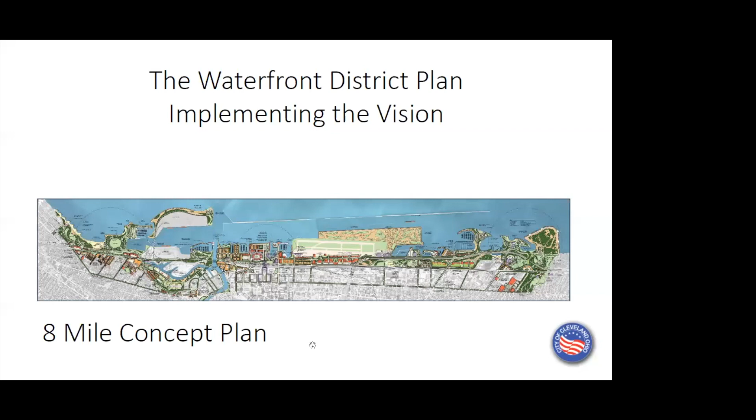Thank you, Kelly, and thank you all people out there who are listening to this presentation. I want to talk a little bit about the journey, and I use that term because when we think about our waterfront, that 8-mile stretch, it is a journey from west to east. As we look back and established the vision for the waterfront, this is the implementation of that vision. This CHEERS process is very important to creating access and opportunities for people in our communities. Next slide, please.

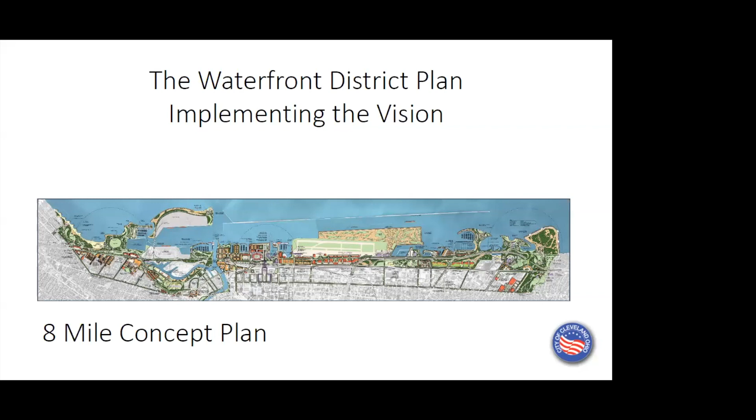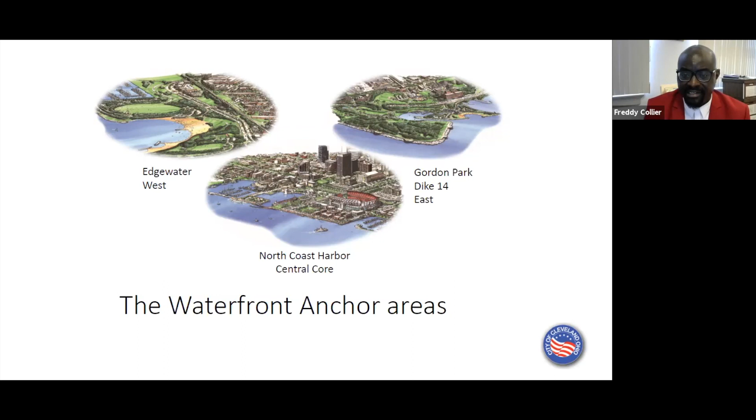When you think about the 8-mile stretch of waterfront, we looked at 3 separate areas: the eastern waterfront, which consists of assets like Gordon Park, Dike 14; the western waterfront, which embraces Edgewater Park, and our North Coast Harbor, our central core waterfront. These geographies really define where the true opportunities exist to capitalize on this God-given asset for our community. Next slide, please.

One of the things you'll notice about the waterfront district plan with respect to its priorities: one was linking neighborhoods — how do we get neighborhoods connecting to the water? You'll hear a lot about that from Mary and the panelists today. Next slide.

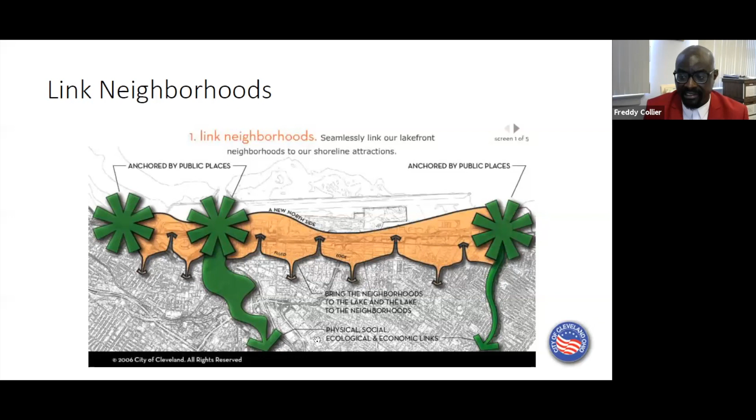Another key piece is how do we master geography and leverage the geographic context that Cleveland sits in? Most of our shoreline sits beneath our mainland and creates great opportunities for great view sheds. Next slide.

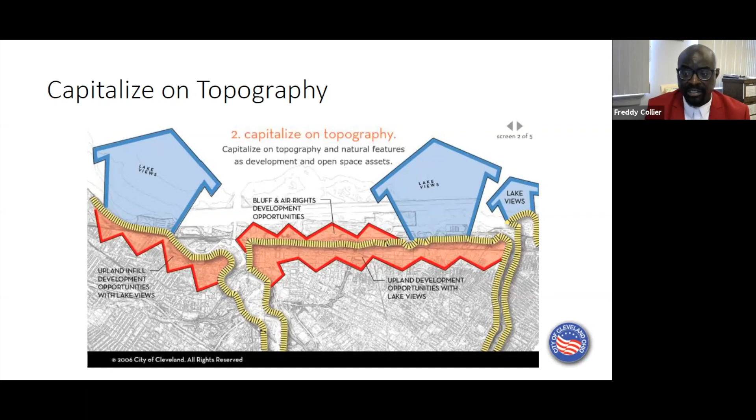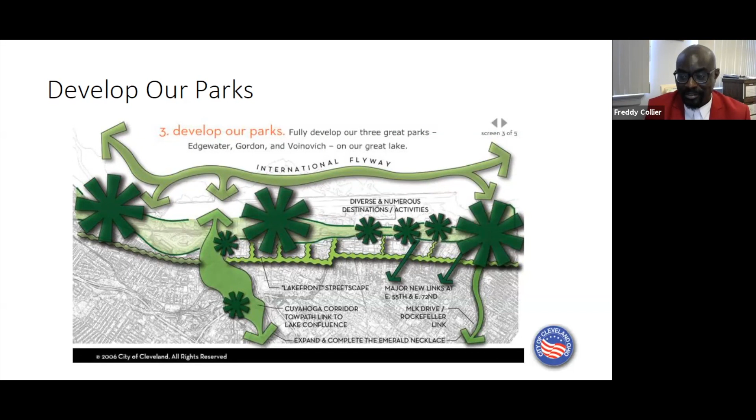Another key principle is how do we leverage and develop our parks, and also extend our parks out into the water, which you'll see a little bit of in the presentation. Next slide, please.

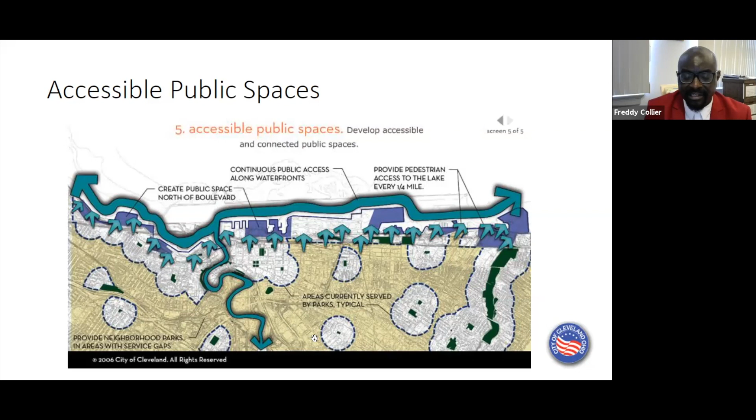One of the most important aspects of the waterfront district plan was the principle around accessible public spaces, and the key word there is accessible. We have to overcome many barriers that were man-made, and in part, what CHEERS in this effort is doing is helping us course correct from some of the historic errors made with respect to the interface between land and water. How do we reclaim that?

Next slide, please. So let's talk a little bit about what we did in the West. Next slide.

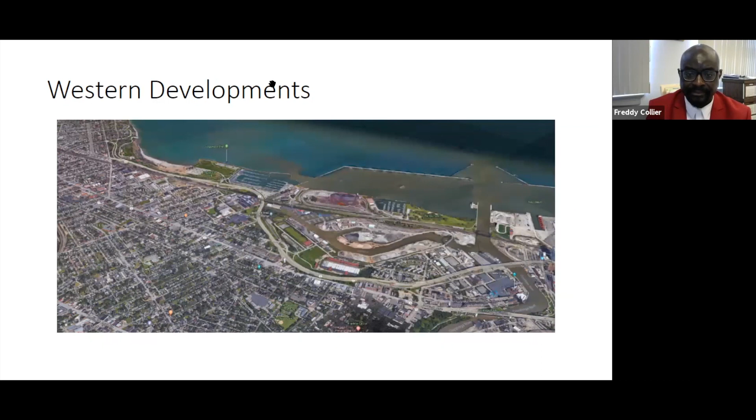To overcome some of those barriers and create those connections, we had to really rethink how we started to punch through man-made barriers, such as railroad tracks, et cetera.

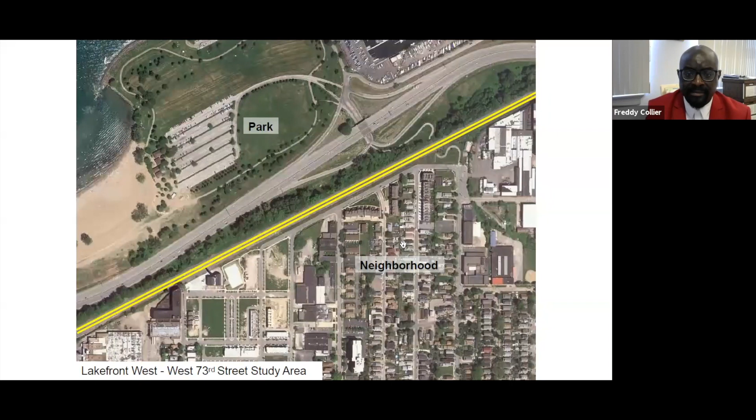So, beginning to take advantage of linkages, we can create opportunities to access things like Edgewater Park and really make it a pedestrian connection, looking at things like West 73rd Street.

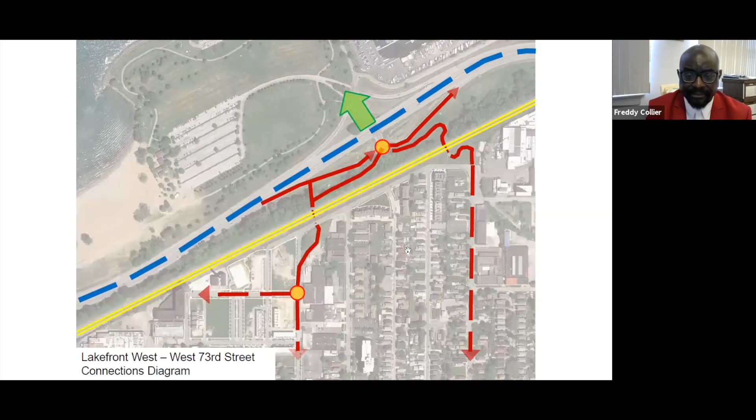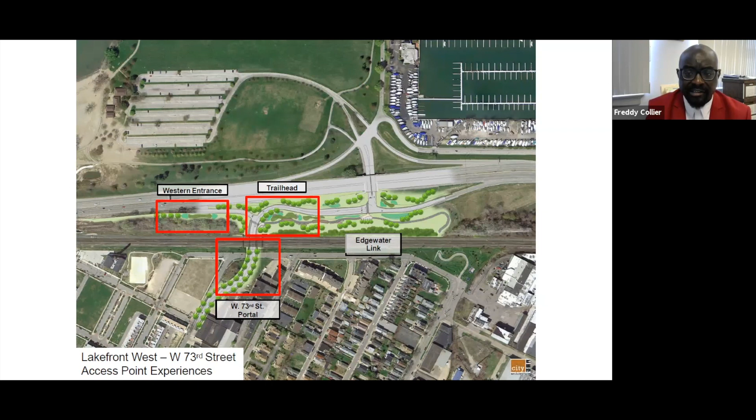These are some examples of earlier renditions of what that connection would look like if you were to punch through underneath the tracks, and you will also create opportunities to overcome the West Shoreway.

The result of creating those infrastructure improvements—one key example is Edgewater Park. Many of you have witnessed the amazing beach house that the Metro Parks implemented, and it now is an asset that actually really draws the neighborhood to the water.

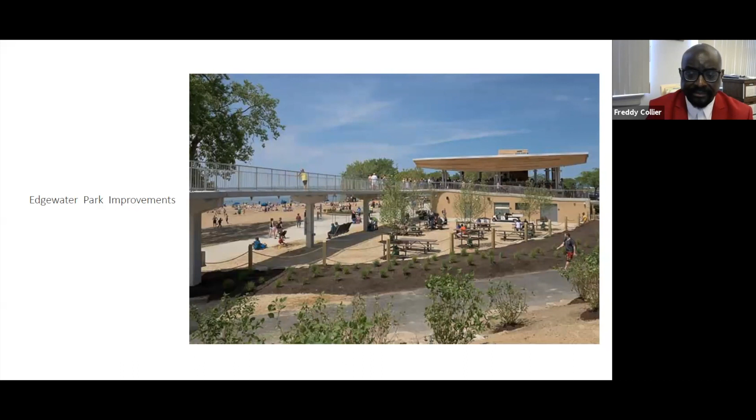Also, neighborhood improvements have resulted. When you start to make land opportunities available and create connections to natural assets, these are the results.

Let's take a look at our harbor front or downtown development. When we look at our core waterfront, how do you begin to connect the downtown grid to our water and make that seamless?

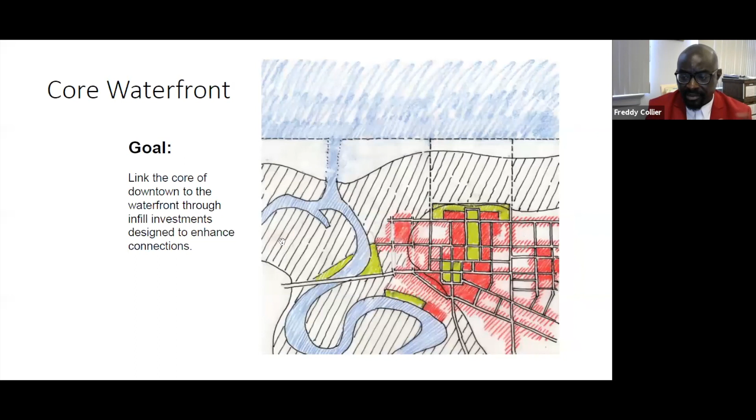So in each one of these sections, we're overcoming hurdles. The first step in that process was improving the malls.

You all know that we've made significant investments in Public Square. We also made significant investments in the malls, and we seek to further connect those.

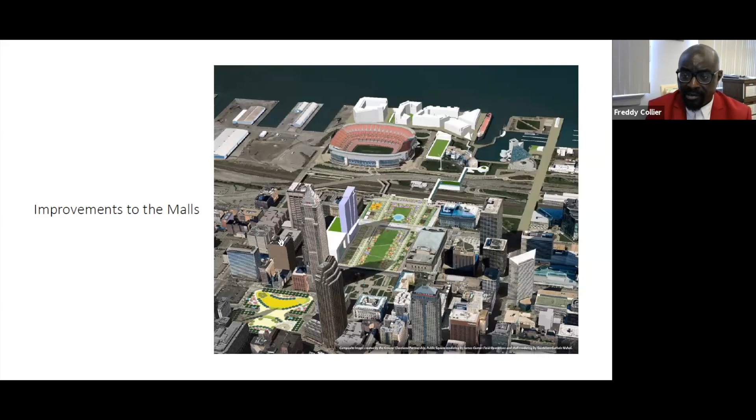As you have recently witnessed with the lakefront connector, this is an example of how we are achieving the goal and envisioning an opportunity to create a seamless interface between our inland neighborhoods and our downtown neighborhoods, so that people can connect and reclaim their relationship with the water.

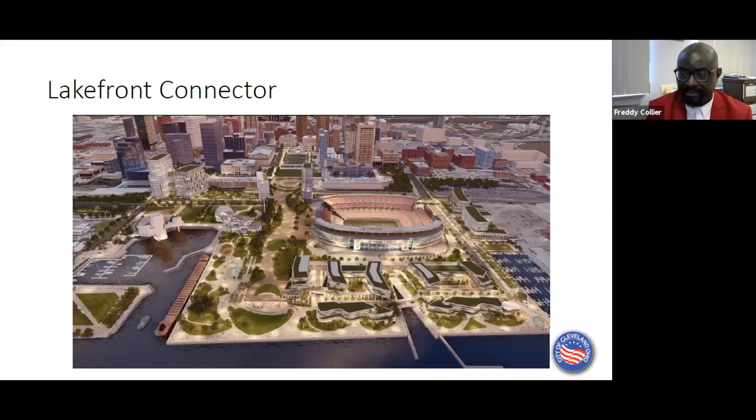These are some other examples of investments that have happened along the waterfront—again, not just creating public space, but also activating our waterfront.

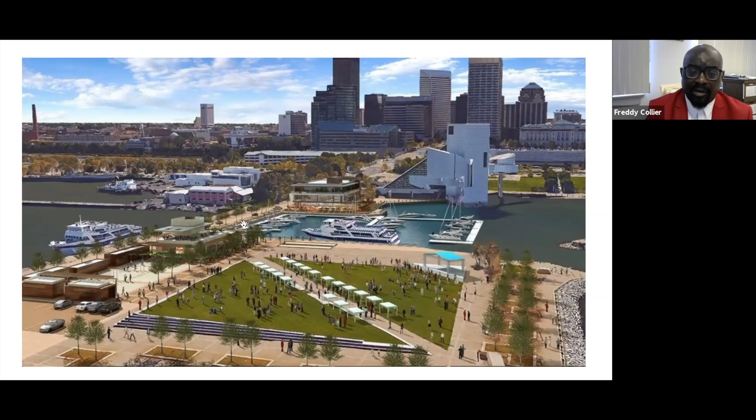Now, as we move east, we start to really look at the true neighborhood opportunities. The eastern development opportunities create a tremendous opportunity to connect the unconnected.

Many of the neighborhoods south of here—if you were not from Cleveland and you were riding down the street just parallel, you would not know you were in a lakefront community. So how do we begin to reestablish that connection?

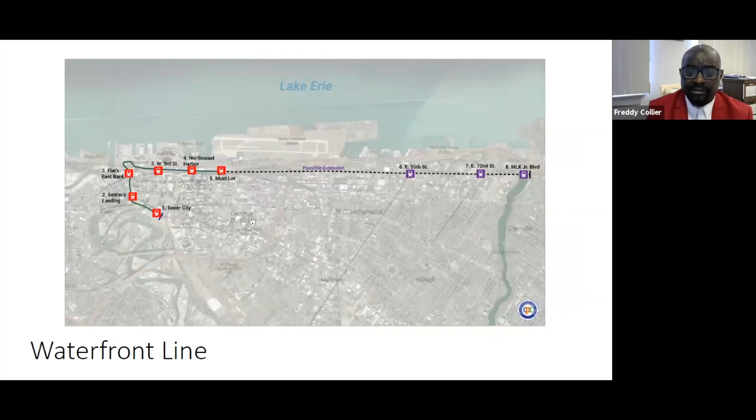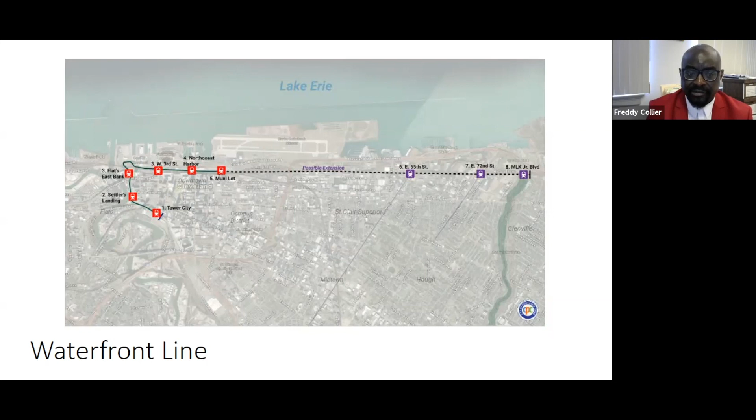One of those connections exists via rail lines. How do we use these north-south streets to create investment opportunities, taking advantage of the connection that exists from our downtown, our river valley—which is our other waterfront—out to these areas that will create access for people, not just through the neighborhood, but by utilizing public transportation.

And also, how can bicyclists and pedestrians connect to this area? We see tremendous opportunities to implement this East Side connector that would connect residents from our core city out east to some of the assets that you're going to be introduced to today.

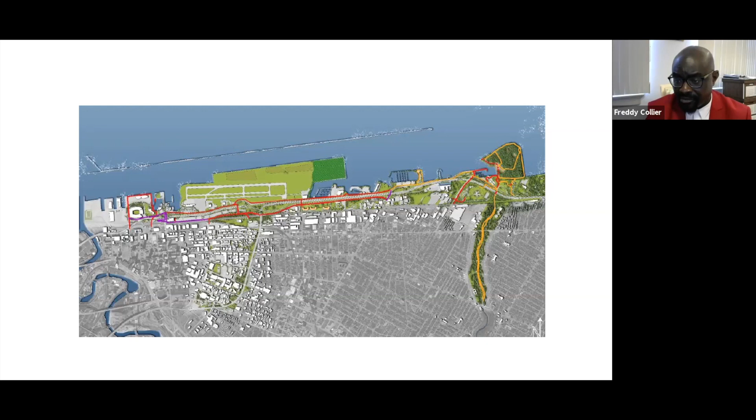I'd be remiss if I didn't talk about the key developments that are happening. The more investments we make, the more human capital we have on our waterfronts—people living, working, biking, experiencing our water on a day-to-day basis. This is key with respect to what you're going to see today.

And the amenity that is created as a result of the CHEERS effort, we believe, will help draw potential residents and visitors to not only come and experience our city, but actually live in our city. The shoreline development is one example of that.

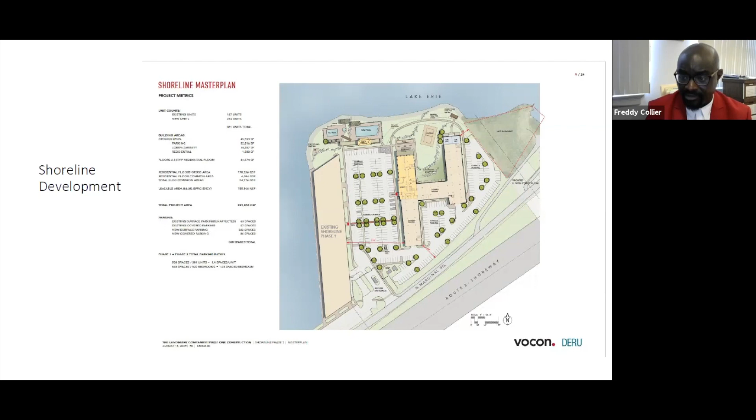And other developments along East 55th Street—that's really going to create an opportunity for people, not just in the city but in the entire region, to experience what you're going to see today.

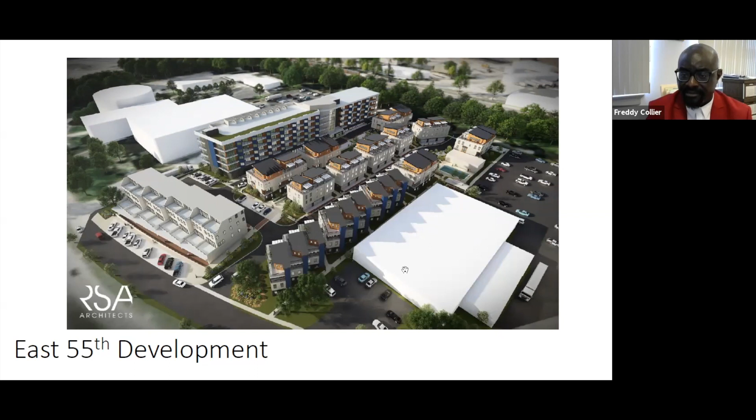So this area that we're talking about is one that was envisioned to be one where connections are made, amenities are created from literally nothing, which is something you're going to see today in this presentation. We seek to create opportunities in neighborhoods to connect our residents back to the water, to protect habitat, and to create true opportunities so that residents can really touch and experience God's asset that he's given to this community.

So I'm going to turn it over to Kelly. She's going to talk to you about this specific opportunity at this specific time that we see us taking advantage of, and creating what the Waterfront District Plan envisioned.

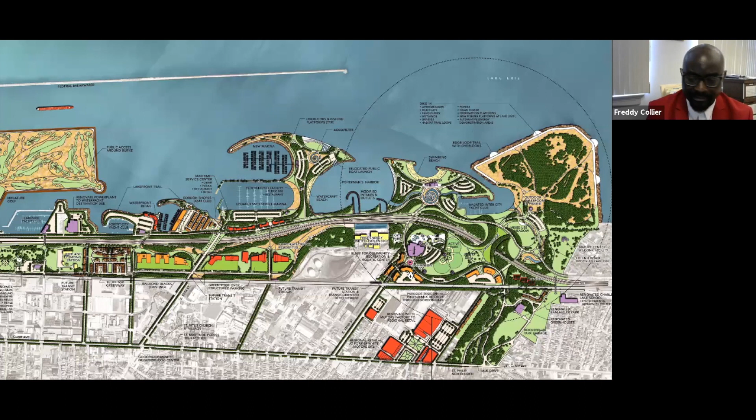Thank you. Kelly? Thanks, Freddy. That was a great introduction and really shows a lot of the potential along the lakefront. So this is an image from the east side lakefront today.

Maybe not the most welcoming weather, but we're really working hard to make Cleveland a four-season city.

A little bit about the conditions in the existing project area. There are some challenges. A lot of this area has heavy duty rock shore protection, steel break walls, just a lot of water, lawn, parking lots, not a lot of in between. We see tremendous impact from the lake.

This project site is east of the terminus of the federal break wall. The image you see here is not an uncommon occurrence, with waves crashing onto the land and along the adjacent I-90 interstate. There's a lack of community access. As Freddy pointed out, we have a lot of neighborhoods adjacent that we really want to feel they are truly lakefront neighborhoods. And then again, just that wave action, storms and ice.

So what's driving this work? We really have a vision that we can create a lot of space for additional habitat. It's also important that we locate places for the beneficial reuse of dredge material. As most Clevelanders know, dredging the federal shipping channel is an important economic driver for us locally. And then making sure we're improving access and lakefront conditions, and as Freddy touched on so well, spurring new and equitable development.

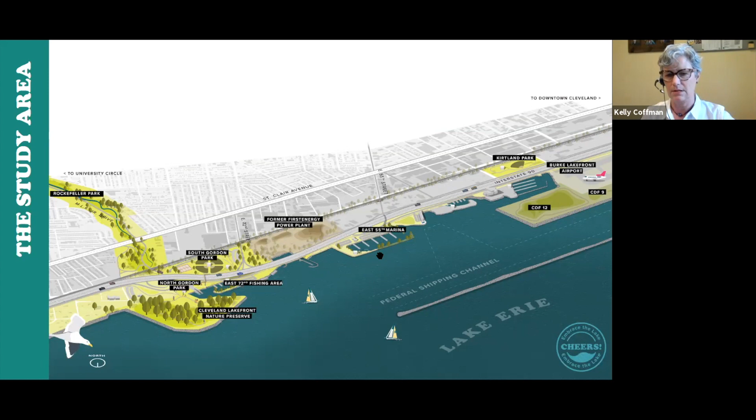So the study area - this is an aerial view to orient folks. Downtown is to the right side of your screen. There's Burke Lakefront Airport, Interstate 90 along that northern edge. And then you see the pockets of park space with East 55th Marina, East 72nd, and the Cleveland Lakefront Nature Preserve.

So with those potential opportunities along this stretch of the lakefront, we were able to form a partnership. It's a partnership right now of 5 entities who are participating equally: the City of Cleveland, Cleveland Metroparks, along with the Ohio Department of Natural Resources, the Ohio Department of Transportation, and the Port of Cleveland.

So the vision for Cheers is really, let's look at this stretch of the lakefront. By the way, Cheers is just an acronym to shorten the Cleveland Harbor Eastern Embayment Resilience Study, because that's definitely a mouthful. But looking at how we can take this resource and build upon it to make it the foundation of a resilient neighborhood.

A crucial part of this project is not only the 5 partners, but engaging with multiple stakeholders, working with agencies also conducting work in the area. There's a lot of important community improvement work going on, and also stakeholders who are maybe more grassroots or smaller organizations that also share in this part of the vision for the lakefront.

So what our work has really been able to do is generate these more specific goals of the 5 partners, with a lot of overlap, a lot of shared goals, but listening to the community and making sure the project is really driven by the input we're receiving from residents. We're working as hard as we can to really hear from those local residents.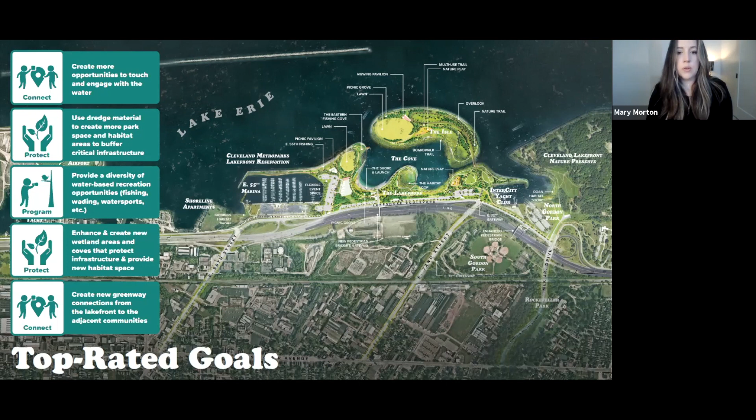We also made sure that we were incorporating those top projects from the engagement session. These were really shaped by that community feedback of what people wanted to see along the lakefront. This includes the protected cove where people can walk down into the water and have more of an actual connection with the water, whereas now they just kind of can stand along the edge and look at it.

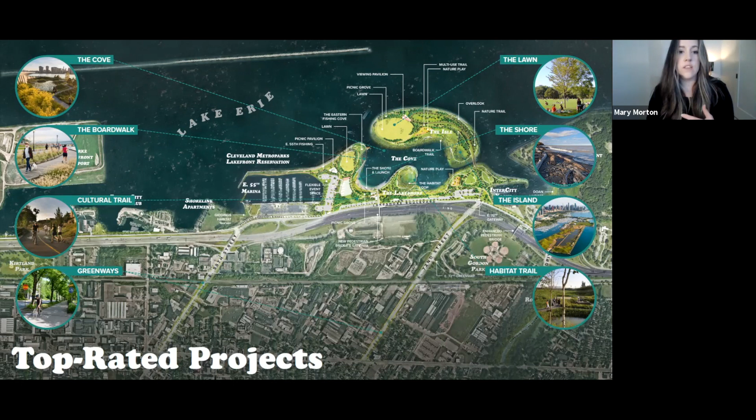As well as multiple trail experiences, including multi-use trails, nature trails, and boardwalk trails, as well as greenways that extend open space back into the community, lawn spaces for picnicking, a shore for wading, and an offshore island that allows for the creation of this really protected cove.

Kelly touched on this a bit, but I'm going to talk about how the plan meets some of these larger goals from a citywide perspective: nature, access, and community.

From the city's perspective, it helps store up to 1.7 million cubic yards of dredge material. This is material that needs to go somewhere, right? It's dredged every year, and this provides a great opportunity to use that material in a way that really connects residents to the lakefront.

It also protects I-90 and improves safety for ODOT. The waves lapping over the highway have been a safety issue for a very long time.

So this provides a clear buffer that really helps remove that issue. And it provides equity and recreation amenities and really supports tourism and economic development for the community.

It also enhances nature with new natural areas, aquatic restoration and improved water quality, and over 6,000 linear feet of softened shoreline. And from an access perspective, it provides not only a diversity of trail experience, but also strengthens those existing neighborhood connections to allow for greater access to the communities.

From the community's perspective, it allows those places for folks to really engage holistically with the water and provides a number of passive and flexible recreation spaces that really build upon what people already love about the lakefront.

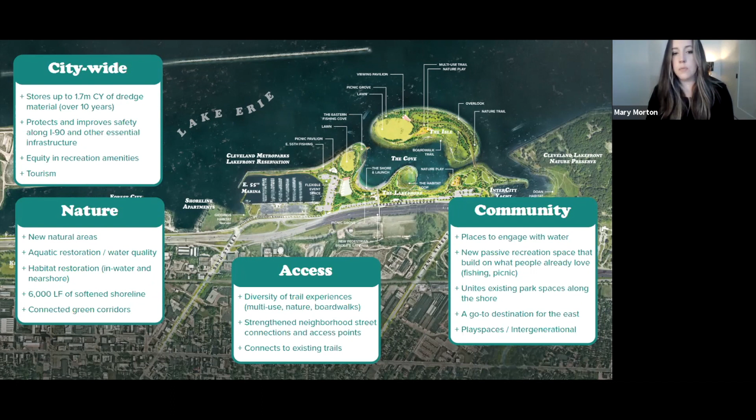So the plan itself is organized in 3 main components. The isle is the offshore island that you see in this image that's really situated offshore to provide protection, but also a whole new way to experience the lakefront, being further out in the water.

The lakeshore extends the existing shoreline, creating a welcoming connected park space that interfaces with adjacent communities. Major gateways at 72nd Street, East 55th Marina, MLK Drive, and a new pedestrian bridge adjacent to the former First Energy plant provide connections to the lakefront with existing neighborhoods like St. Clair Superior and Glenville, as well as Hough.

These gateways not only provide a safe and accessible connection for pedestrians and bicyclists, but they also serve as trailheads, strengthening the existing local and regional trail system.

The lakeshore also leverages existing activity nodes at 55th Street Marina and North Gordon Park, where folks already enjoy to fish, creating a new gathering recreation space to serve the community. The Cove is then nestled between the two, providing those spaces for habitat restoration and water-based recreation in a protected area.

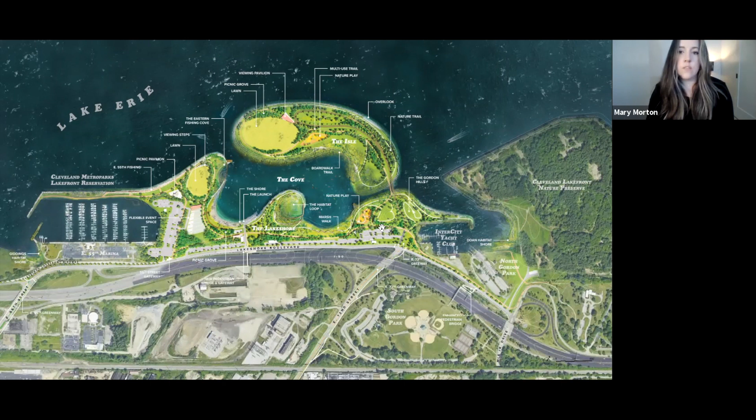So the planned systems of community, nature, water, and circulation really help adapt to the changing needs of the surrounding communities and the environment. Together, these systems work to bolster the quality of the natural environment, physical and mental well-being, safety, and Cleveland's economic development and tourism.

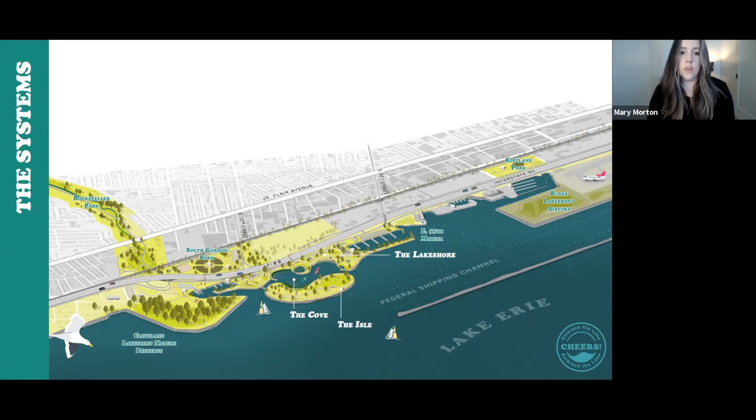A variety of community serving spaces line the lakefront and the Isle. This includes visitor amenities like concessions and restrooms, play spaces, and water recreation, including kayaking and fishing, as well as viewing and scenic areas where community members can take in expansive views of the city.

And then those flexible lawn and picnic areas for passive and active recreation that also allow for immersive natural experiences.

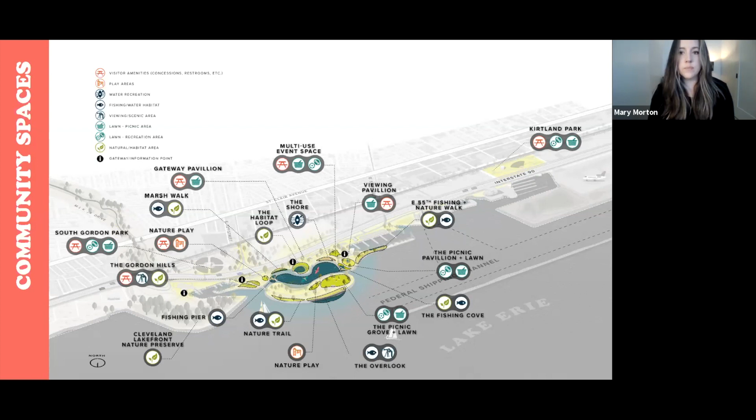The plan includes a variety of trail types to serve multiple user groups, from multi-use paved trails for biking, walking, and running, nature trails that meander through new wetlands, marshes, and habitat spaces, and boardwalk trails that extend over the water of the Cove.

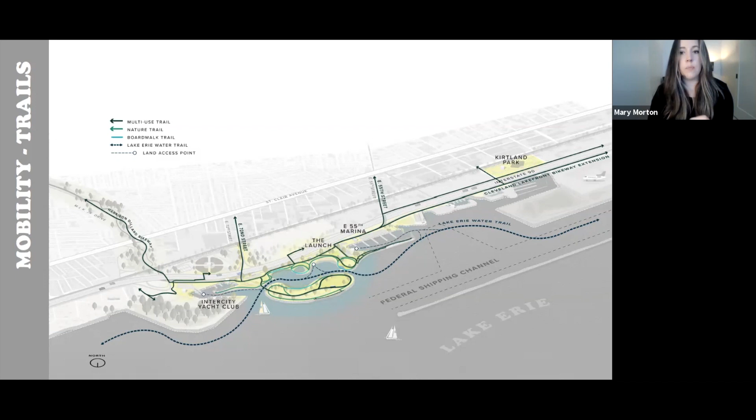All of these trails connect back to those existing regional and local trails like the Lake Erie Water Trail and the Cleveland Lakefront Bikeway that Director Collier talked about earlier.

From the vehicle perspective, with the expansion of the parkland adjacent to I-90, it allows for the extension of Marginal Drive, which is now called Lakeshore Drive. Right now you have to actually hop on the highway to get from one side of the lakefront to the other, so this allows a more seamless connection and a parkway that really connects those parks.

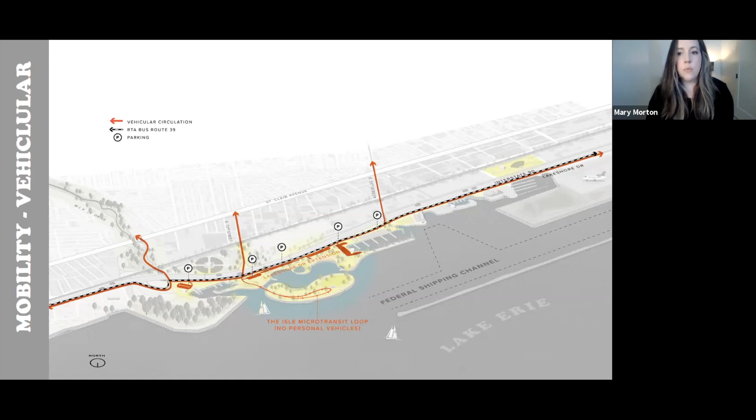Parking lots and vehicular circulation are also hung off of that main drive, which improves the whole experience of someone enjoying the lakefront. Also, by improving the frequency of the existing RTA route and providing a shuttle or microtransit loop that brings folks out onto the Isle, this will help reduce dependence on cars for the long term.

The creation of an offshore isle, as I mentioned before, allows for the softening or semi-softening of the interior of the Cove. So you can see in this diagram the direction of wave forces that are quite intense.

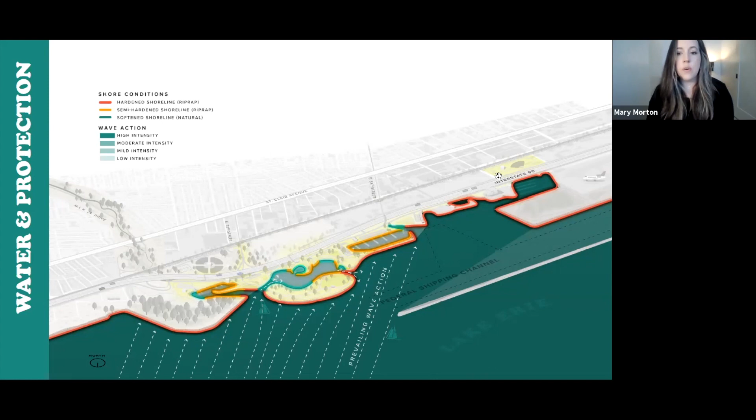The areas in red and orange represent an intensity of wave action, which necessitates larger stone and protection structures, while areas in green and yellow represent areas where the shoreline can be softened.

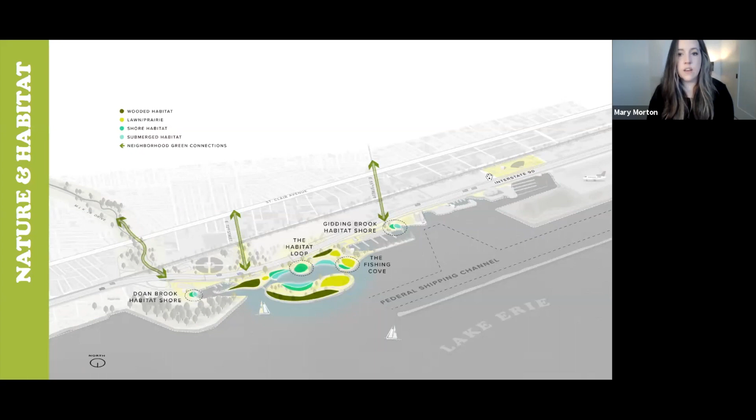The protection provided by the Isle also allows for expansive new habitat areas and natural areas, both in water and on the shore.

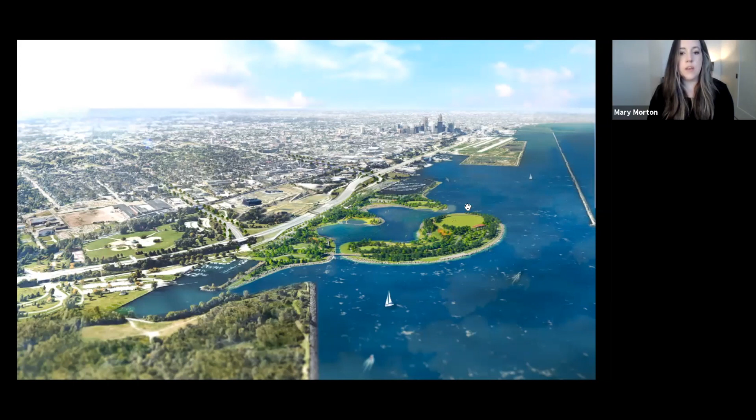I'm going to quickly walk through some of the experiences or rooms of the plan that were really animated by this community input.

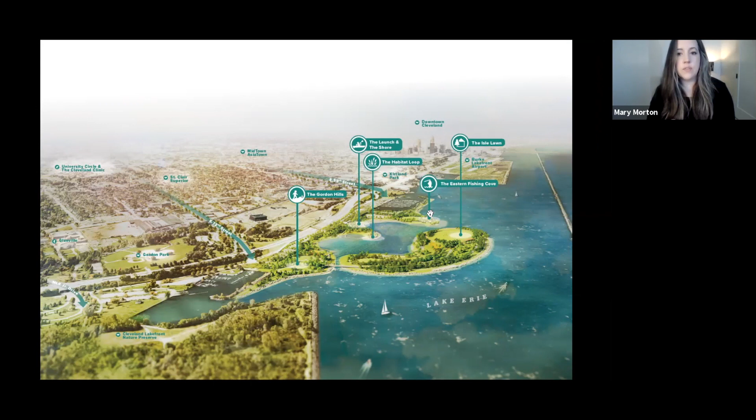This graphic highlights the rooms we'll be walking through, from the Gordon Hills at the end of East 72nd to the Habitat Loop, the launch and the shore, the Eastern Fishing Cove adjacent to the existing node of activity at 55th Street Marina, and the lawn located on the Isle.

Situated at the terminus of East 72nd Street, the Gordon Hills rise over 35 feet above the existing lakefront, giving visitors stunning views of the shoreline, Lake Erie, and the Cleveland skyline. The Gordon Hills also provide a year-round node of activity, changing with each season, offering sledding in winter, leaf peeping in fall, meadow wildflowers in spring, and a prime firework and air show viewing destination in summer.

Moving on to the Habitat Loop, located north of that current pinch point between I-90 and the lakefront that Kelly talked about. Here, trails meander along and loop through naturalized shoreline that includes marsh areas and wetland habitat. The trail connects existing park spaces and new habitat areas, providing space for nature lovers, birders, and walkers to enjoy. Visitors will find a series of nature and boardwalk trails that loop through wetland and shrub habitat.

The Shore provides a new water-based experience along the eastern lakefront that many community members requested throughout the process. The creation of land from dredged material creates a safe place for visitors to wade and walk down into the water. This new amenity gives Eastsiders a place to touch and directly interact with the water in a protected and calm cove. The launch responds to the community's desire for more spaces for water sports, in particular places to rent and learn how to operate watercraft like kayaks, paddleboards, and canoes. The launch includes both an accessible slope deck and a naturalized shoreline area to launch watercraft, and an adjacent building with a pavilion provides a location for renting equipment, accessing restrooms, and purchasing concessions.

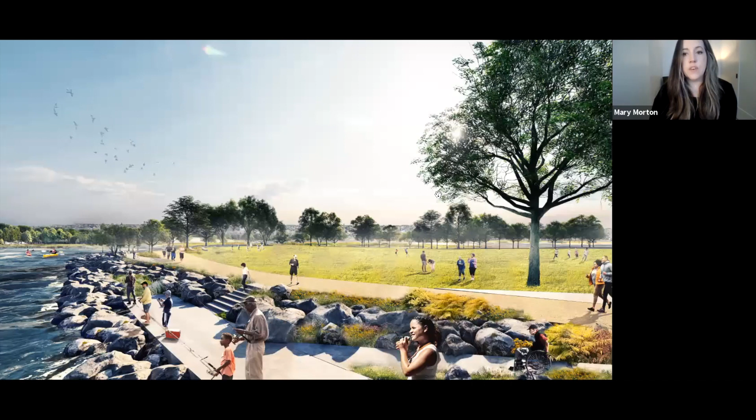The Eastern Fishing Cove builds off of the existing node of fishing activity at East 55th and responds to a desire for more places to fish, areas where folks can be closer to the water, and more viewing and observation areas to take in the picturesque views of Lake Erie and downtown Cleveland. Located adjacent to flexible lawn and event spaces, fishing amenities and restrooms create a node of intergenerational activity where families can spend the day fishing, picnicking, and enjoying views of the water.

And then finally, the Isle. This is a place where visitors can walk or bike across the bridge, or paddle out through the cove, and wander through vegetated trails, tree-lined lawns, and nature play areas, immersing themselves in the unique natural environment of Lake Erie. Created from dredged material, this barrier island provides protection for the shoreline, allowing the creation of a protected cove and softening of the shoreline.

And then touching again, just to end on those gateways and community greenways: the 72nd Street Gateway becomes one of the key gateways into the park spaces, providing an essential link to communities with wayfinding, visitor amenities, and gathering spaces.

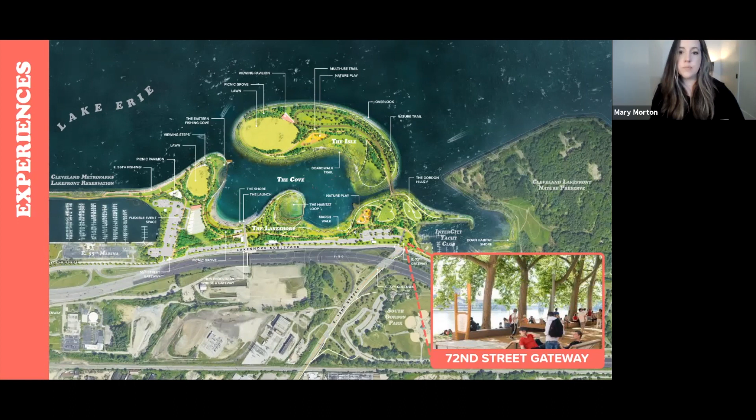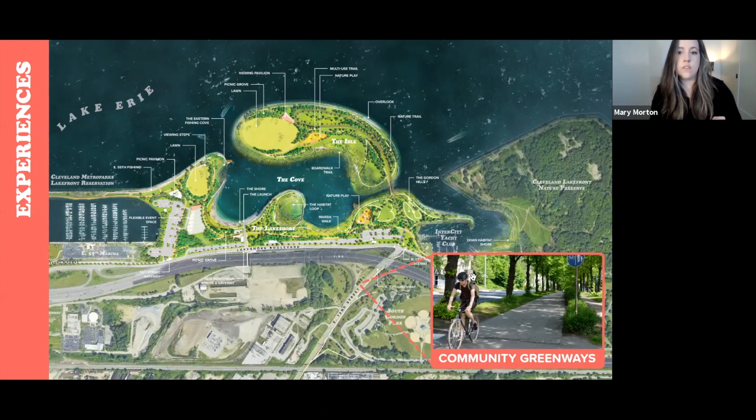The community greenways really envision a series of green neighborhood connections that extend park spaces from the lakefront back to adjacent neighborhoods along existing streets. These greenways, or green fingers, include necessary safety improvements for pedestrians and bicyclists and new planting and street trees. Smaller vacant lots located along these streets create potential for a string of pocket parks along the greenways.

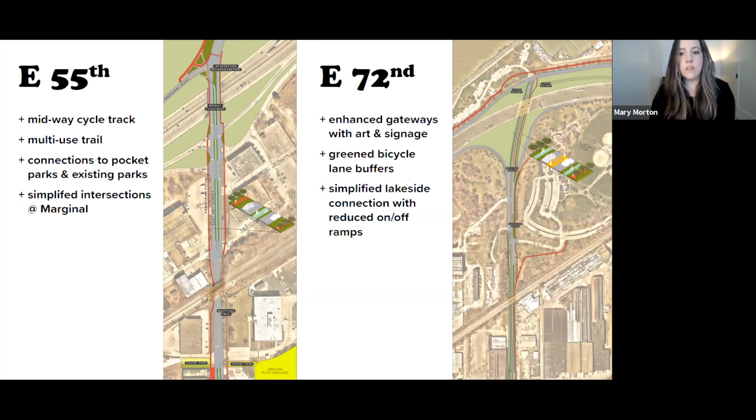While each of these street segments will undergo further planning and design work through the ongoing Safe Routes to Parks initiative, we also looked at them through the Cheers process to think about what the vision could be for the future and focus on those potential improvements. This envisions implementation of the city's Midway Cycle Track Improvement Plan along East 55th, where a landscape-buffered central bike lane provides greater bike access, while a wide multi-use trail segment along the north and south lanes provides pedestrian access.

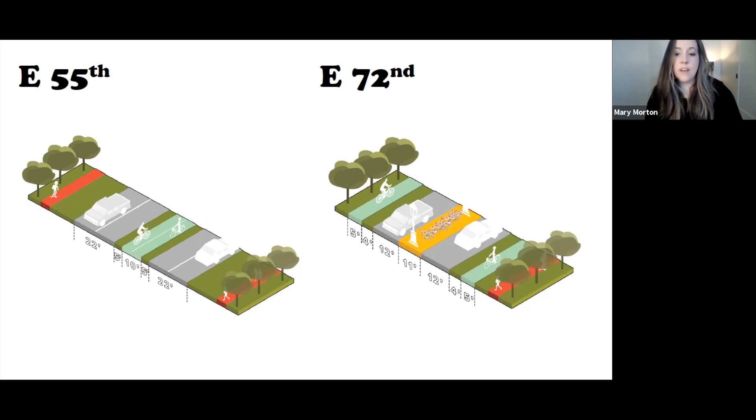And then for East 72nd, we reimagined that as a greenway with buffered bike lanes and a multi-use trail, as well as art, planting, and wayfinding in the current concrete median. So with that, I'm going to pass it back to Kelly to talk about implementation and ongoing engagement.

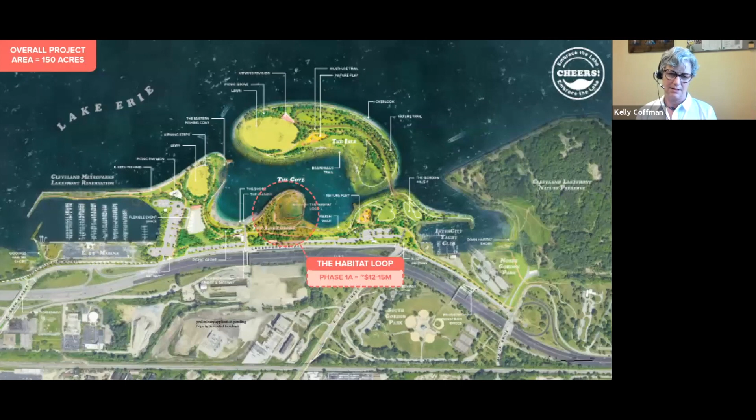And so we've been talking about a potential phase 1, phase 2, and really kind of honing in on an initial project that'll serve as a proof of concept that'll show if we have that hardened outer edge, does that really allow us to have the softened habitat, really get people closer to touching the water. It protects infrastructure. And so it's just a great example of what the entire project can achieve, but fast tracking that to construction.

So with that, we really wanted to open things up and hear from attendees and do a little Q&A. I think we've got 10 or 15 minutes, and would love to hear what people are curious to learn more about. Kelly, I have some questions in the Q&A, and I'll read them to you.

One interesting question is, does this plan consider the potential for rising lake levels due to climate change?

Yes, I know one of the consultant partners, KS Associates, did do an analysis. Mary, I don't know if you want to speak to that in more detail. Yeah, I can talk about that a little bit. So our partner KS Associates, they have a lot of experience working in and around the Great Lakes region, specifically related to improvements like this. And one of the things that we did very early on was set a design height, essentially. So in addition to looking at wave action throughout the study area at a high level, we also looked at what those future lake levels might look like. So everything that is designed in the conceptual plan is based on that potential for those higher lake levels.